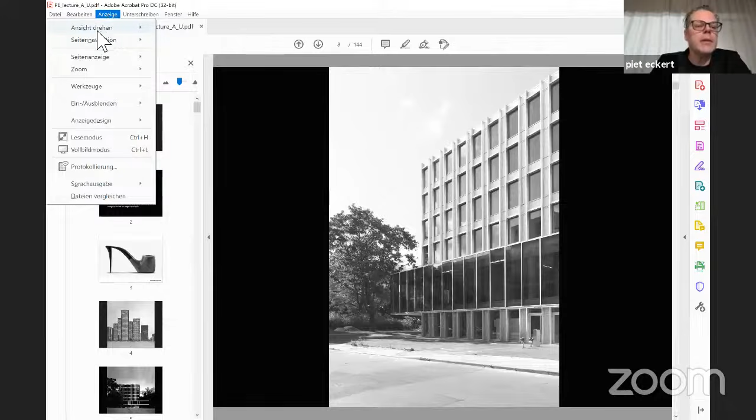Okay, so it's a pleasure for me, and good morning from Switzerland. As Sang Kwan said, this is a particular time here to really reach so many people across the globe. It's 7 o'clock in the morning here. I'm trying to give you an insight about the way my brother and I work on our projects.

We call this issue, but also our work, a frame of strategic methodologies. We are very interested in methodologies in the sense of how do we get today really to an architectural result, and what really influences us effectively in doing so.

I start this short lecture with a small statement: a strategic architecture mixes elements, value systems, and action logics. It opens up a combination of essential priorities. The target of strategic architecture is to manage the coexistence of conflicting values. This is very important for us.

We analyze a lot in the office in order to learn from paradoxes or from discrepancies, so to speak, how to deal with things that seemingly do not fit together.

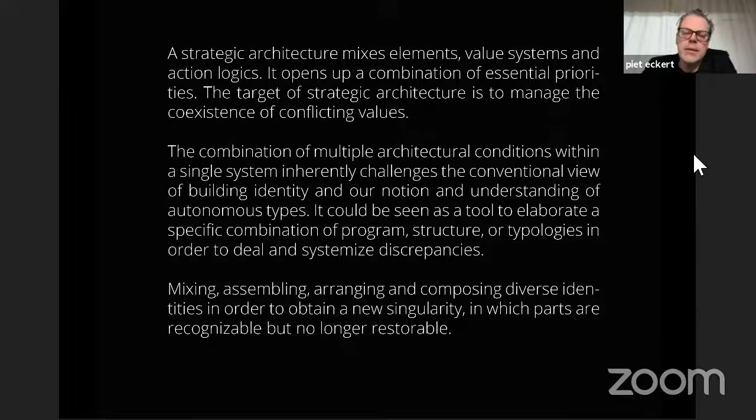I think one of my favorite artists is Jusovic, a Croatian architect and also artist, creating this work—a pipe in the form of a shoe—and it enlightens this idea that I'm trying to make here. Within the realm of art, finding a specific cross-section that connects, to some extent, things that have nothing in common—between the pipe and the shoe—but by the fact it fuses, its condition changes.

And by that, of course, art doesn't have to create or find a new functionality—that's the force of art. But on the other hand, you see in a very obvious and evident way how a new object arises, one that can be read in many different metaphorical ways—between the male and the female, between the paternal and the elegant, etc.

So this is an interest that has followed us from the very early beginning on.

My brother and me, we started our work by using the work of Mies and speculating on issues - how, for example, you could step up scales, or how you could find configurations that would lead to new programmatical, performative, or configurative constellations. We used the architecture of Mies to liberate ourselves specifically from the aspect of architecture, because it was so sublime that it gave us a moment of freedom, not having the obligation to think about what architecture must or should be. I think that enlightens a similar process.

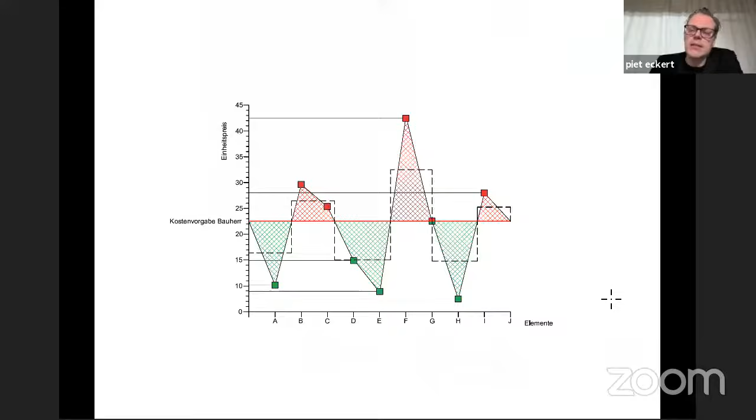So instead of running a flat line, we tried to open the spline, so to speak. It's the same model, and this is very exciting for us. This is the architectural formal expression of that - this is where you save money, and this is where you spend it. So there is almost a deal within your own architecture about what intensity, prioritization, and attention you give to the project. It's not a project without detail focus, but one that relates exactly to this strategic axis. Of course, it got built and is running successfully.

Over the years we collected this catalog, and became more aware that this methodological aspect we were interested in can be juxtaposed, compared, and related to each other. This is actually the sense of the body of our work, because we operate in a way trying to find an answer to an analyzed brief that discovers things that might be risky or incoherent, and then we try to impose this as a strategic form.

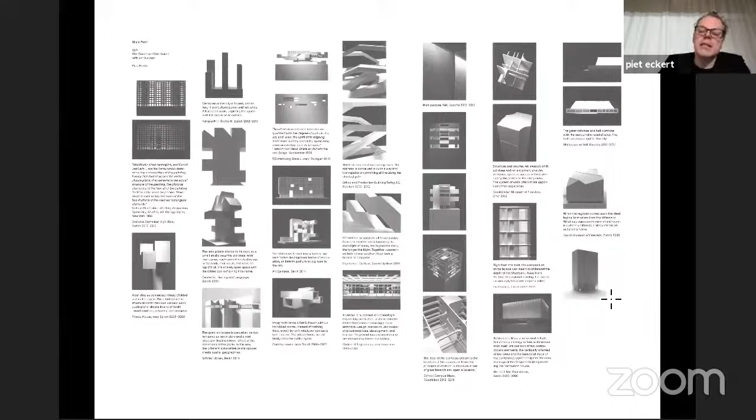I'm showing a few projects because I'm aware of the shortage of time, but we look at a western part of Zurich, which used to be a back office and warehouse area with lots of different types of buildings - a relatively robust quarter, giving an impression of the nearby context. It's a mixed area between workshops and large back offices of international banks. This is the context where our client asked us to design a new high-rise building - in Swiss terms, 40 meters.

We received this program and had to sort it out and organize it. It was a business hotel, a palliative care healthcare concept, with a client that is a diaconry, so based in the health business.

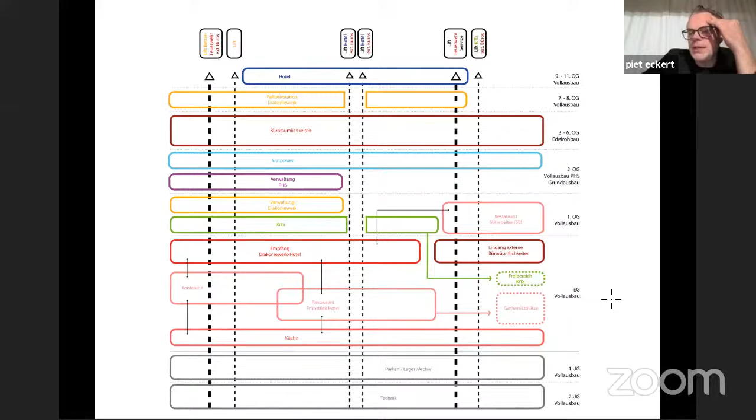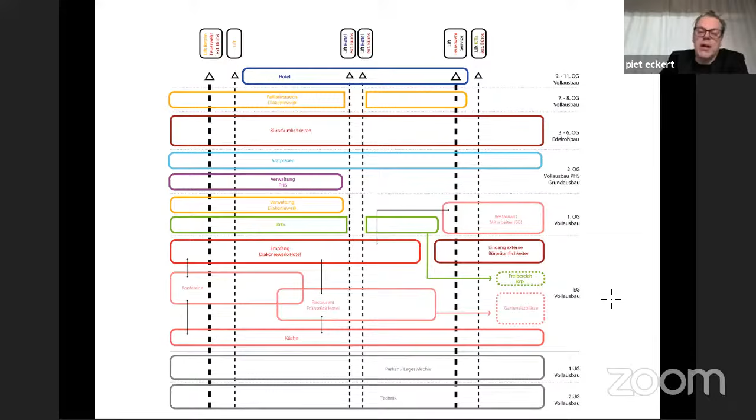So this is a mixed-use building, and the question that arises is how do you make an architecture that really works independently of program and activity. The first part of our commission was to encounter exactly this condition, and we came up with a resilient idea: a load-bearing concept with a gridded facade and an eccentric core, slightly shifted, to allow different spans in the building.

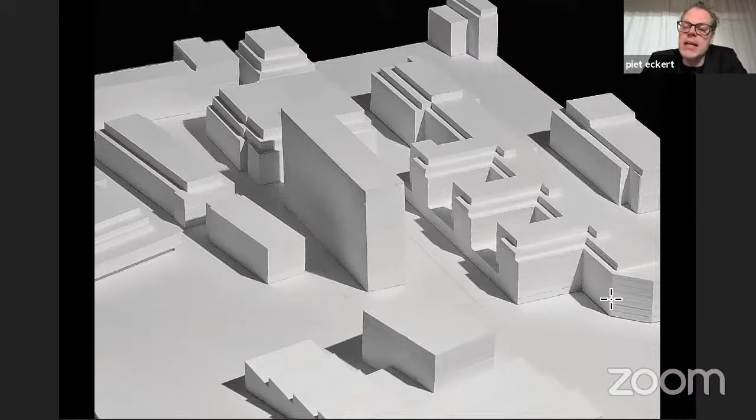It's an architecture that deals with exactly two components: core and load-bearing facades. There's not a singular column in this building. The urban scheme allowed a slab building 40 meters high, 15 wide, 85 meters long. And this was the project.

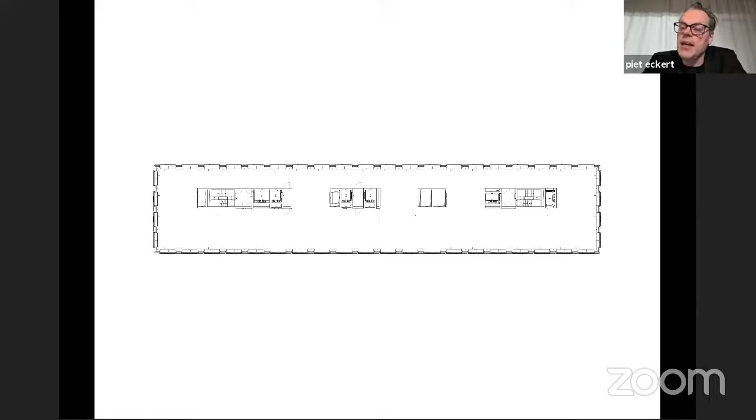The first phase of our contractual delivery was an accentuation of a load-bearing facade and an eccentric array of cores that could deliver and perform simultaneously different programs, such as a palliative care next to a business hotel. And this was the expression of space.

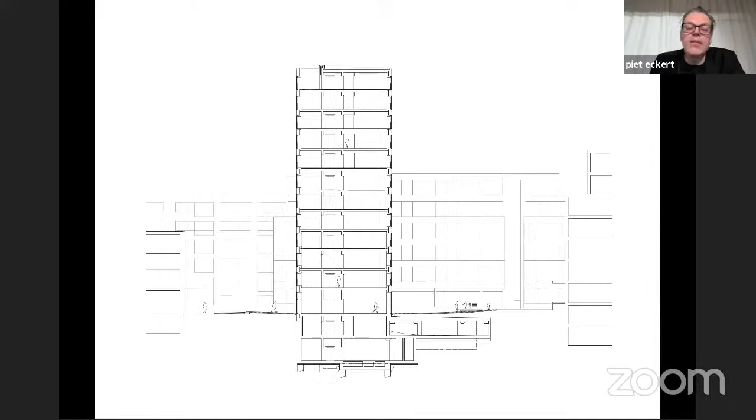It was a concrete shell with a concrete core cast in situ, and load-bearing facades designed by precast elements. You see how this small high-rise, this slender slab building, sits in a kind of courtyard condition.

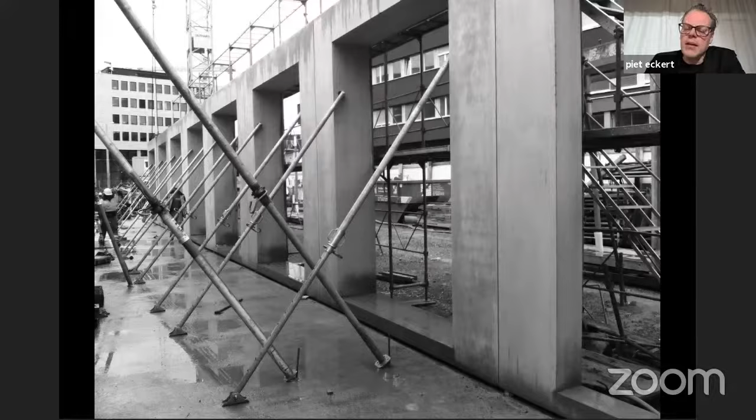These were the elements we designed, the precast elements that became the load-bearing elements on the outside. We could basically build the building like a Lego building, so with very high speed the building got assembled on site. You see the progression here, the assembly.

What we had in mind was to intensify exactly these two elements. The precast concrete elements were done in a perfection that there was no necessity nor financial possibility to really cover them. So the idea was a primary expression of architecture that resembles the core and load-bearing facades, leaving the space in between as a filling, a complementary architectural agenda.

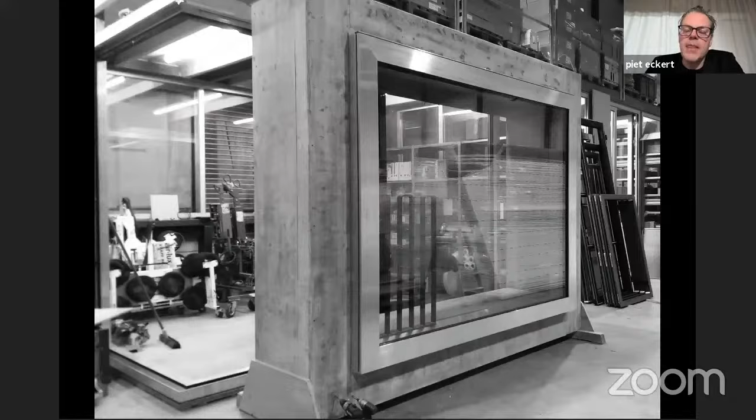We equipped this project with a sliding window, which is very difficult to do in Switzerland because sliders normally have brushes and aren't really tight, so you lose a lot of energy. We designed this as an electric slider combined with air pressure, like you see in any bus in Tokyo or Zurich, where every time the door closes they put pressure in the lips to create a tightening condition.

So we managed to organize a window that could be opened through the release of air pressure and closed, an almost automotive project assembled on site. The project had this very resilient, robust expression of architecture, with a slider that could always react to any activity or simultaneity in the project.

Although the project is very rigorous in its sense of order, it is very playful in its consequences. The building sits very calmly, almost stoically, in a heterogeneous site with all kinds of different buildings and ambitions. You see slight irritations from this order expressing individual activities of individual programs that we can no longer steer, creating this rigor in order to allow a very relaxed, tolerant way of accommodating whatever happens.

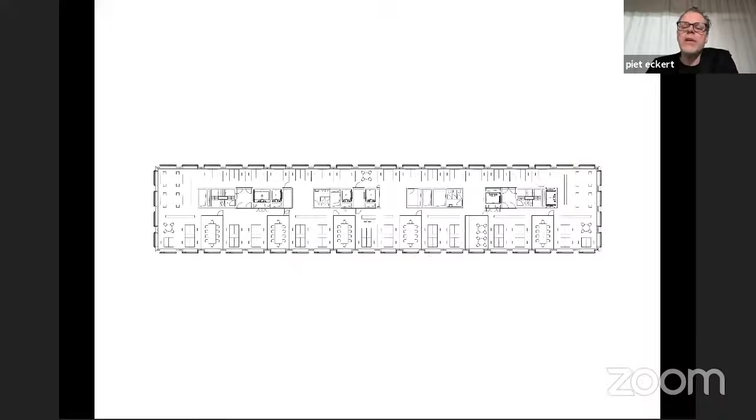So in a way, it was a very defensive strategy, but luckily we could in the end design the entire building as if we could test our own strategy. You see these shifts and so on. And this was basically the approval, or the system.

We had an office layer, and you see now how the same building supports a fundamentally different program, such as a healthcare clinic, which is here, such as a business hotel, which is here. So it is an interesting way to sustain these approaches of interior exploitation of the building.

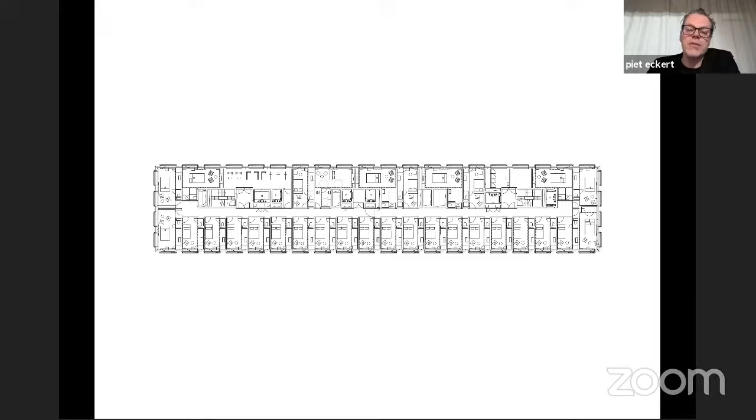I'll give you just a few images, and you see that this concrete shell, the load-bearing wall, has always been the same, but it's never the same. This is exactly what we were aiming for. It's a primal expression of architecture that's countered by different tones, different materials, different lyrics, so to speak.

This was the business hotel. You see how a wood fit-out encounters our concrete shell. This was part of the hotel, part of the suites on the top level. You see always the same elements, the concrete elements, that through different kinds of uses are just changing context. It shows how this resilience of architecture can really be performative, and every time it creates a different setting, a different atmosphere.

Later, we built our own office in it. It's a very simple concept, an aisle of 85 meters, running the whole length of the building, working with the same concept again. So really using this expression of concrete to encounter the palliative healthcare, which is a delicate program, because people are being served and cared for in their last moments of life.

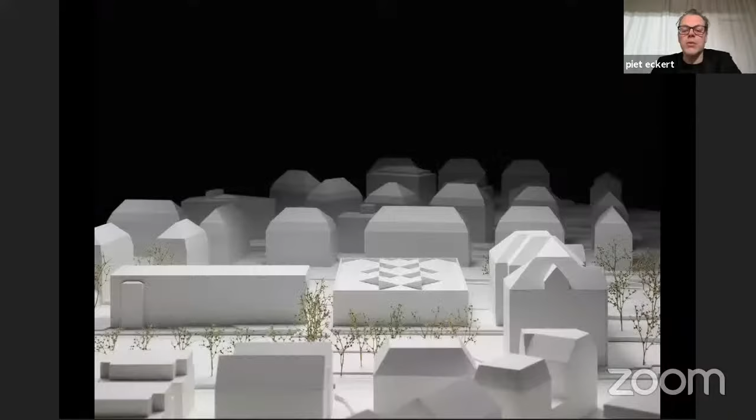So I'm shifting to a different program, educational program. Public building is a big issue for us. We think that we should urge our architect colleagues as well to strengthen the architectural discipline along public buildings, because it's so important, the expression of public institutional architecture.

Now, this is a very prestigious site. It's an old school campus with an early Swiss modernist architecture school on one side, from the former city architect Hermann Herter in Zurich, and on the other hand, there's an old national-style school building from the 19th century. Our extension sits in a very low habit and tries to accomplish and extend this site.

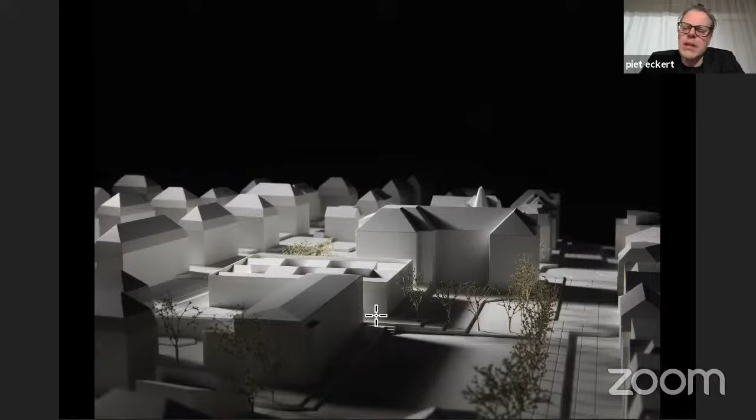The program was a very challenging one. It was a triple sporting hall and a secondary school with classrooms, libraries, a school kitchen, and the possibility to facilitate the midday lunch area. So you see the silhouettes of the building. We're trying to really not interfere with the two listed buildings that are organizing this perpendicular space frame.

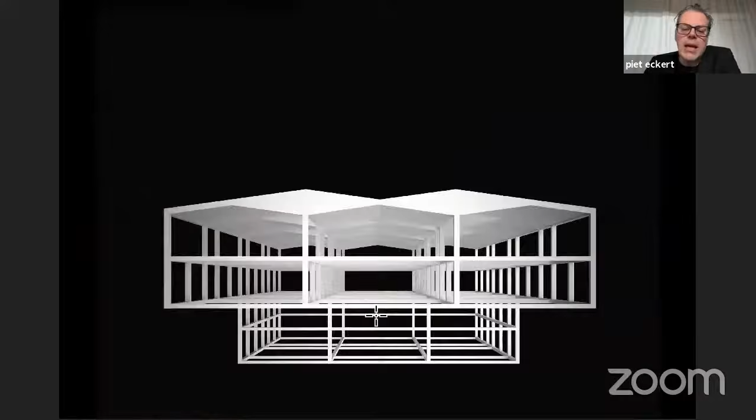What we have done, and this enlightens our interest in this strategic methodology, is we very quickly realized that we were interested in merging the architecture of the hall with the architecture of the school. Normally in a campus, of course, you would do it apart. But one creates an obligation, so to speak, to the other, and by doing that, it creates the question: how are you imposing one obligation on the other, and what can you discover from that?

So the image you see is a triple sport hall that got structured and spanned by a space frame, and on the top level there's a school sitting on top of this hall.

The sport hall is sunken into the ground, and this created this structural model where you see the space frame bridging the deep underground lying sport hall. This creates a different proportion, a different dimension for the school that arises on top.

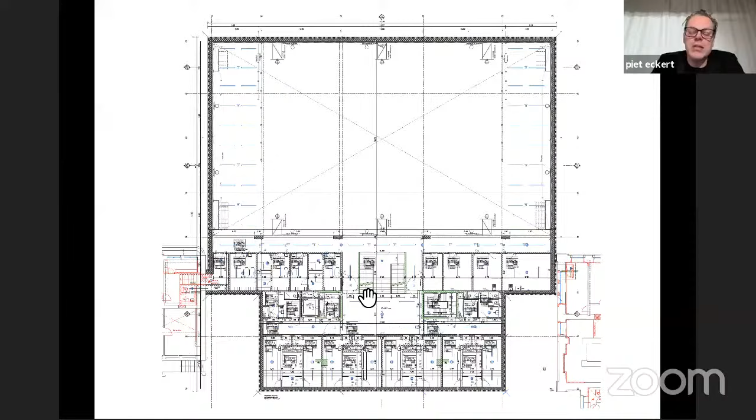This was the triple sport hall, the plan on the underground. You see 1, 2, 3 halls, you see the guardrobes, and here you see we are almost finishing the building by end of March. We are happy to give it over to the city.

So you see the space frames that go across, that basically sit at the ground level and create the daylight access into it, and then deeply in it we organize this hall.

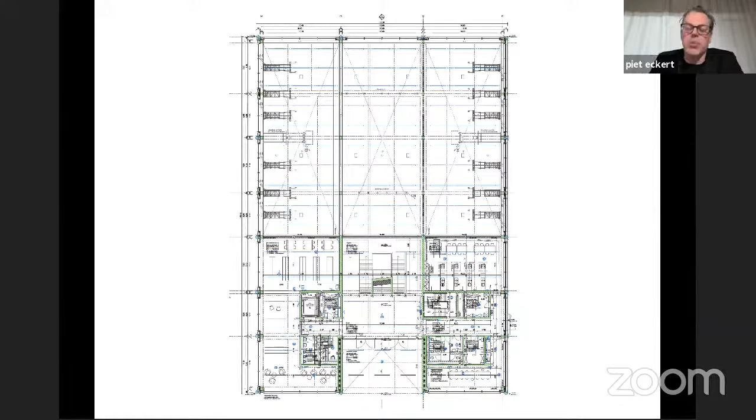And it creates a dimension for the school which is very bizarre, because if you build classrooms independently from a gym room, you would make a different layout, which is clear.

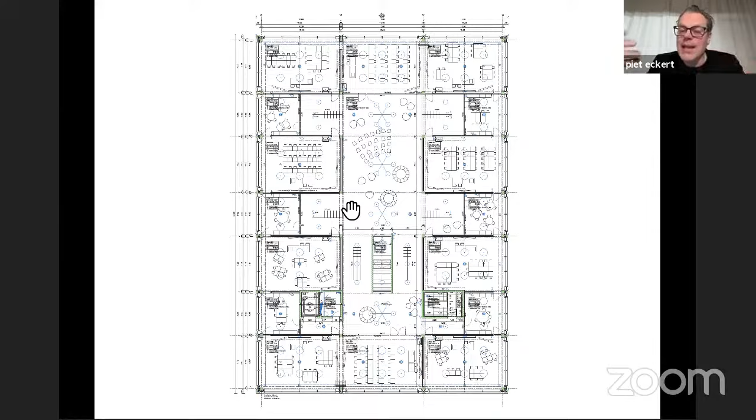What we did to really exploit the extra depth of the space is we turned the classroom perpendicularly 90 degrees and used the short side, introducing a second facade. So they're lit from two sides, which creates an expression of roof, basically a combination between a pitch and a shed.

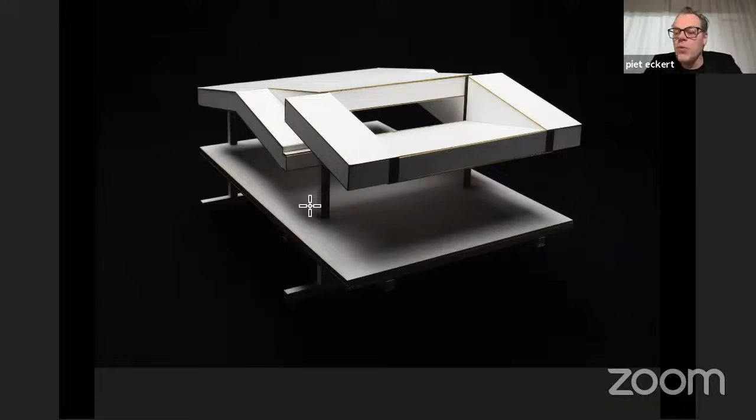So what we created is a lighting system for the aisle, and in the next bay a lighting system for the classroom. This creates the roof system that is basically the architectural answer to the brief: to create a school with an extra depth of space.

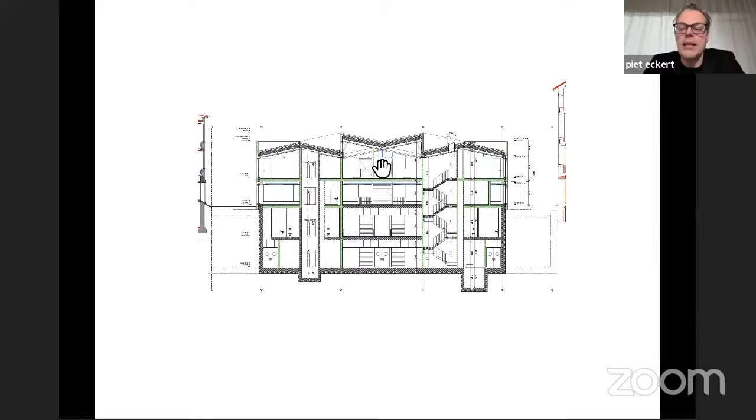You see this quite well in the drawings. This is the pitch condition of the classrooms, and you see how the pitch opens in a shed way, skylighting the central aisle, which is a didactic free zone where you can play in groups. Then in the next bay you see how the light is introduced on two sides, from the outside and from the skylight side.

You see the space frames that go across, sitting on the sporting hall, creating a very intense package. You could call it an alter ego or an obligation of a new body, where both elements need to be architecturally exploited.

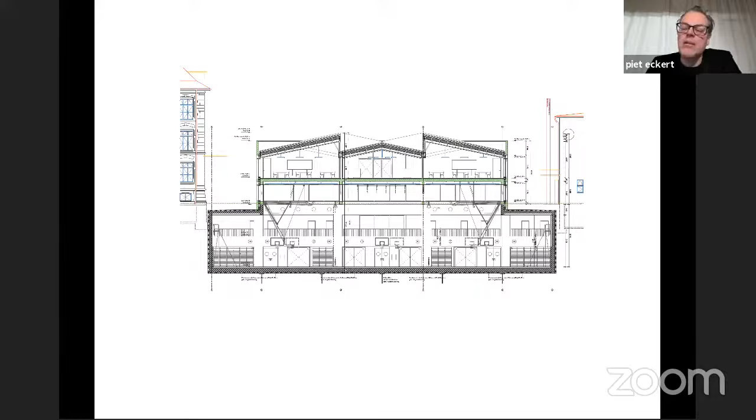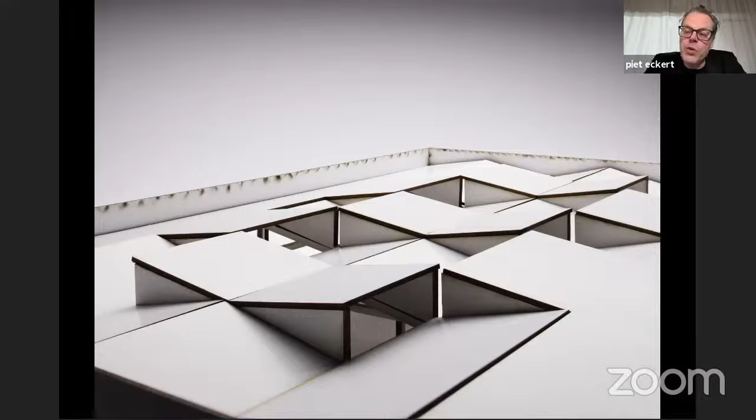You see the long section, the same system. This roof, of course, was also linking to the neighborhood, to the pitch roofs nearby, so we could link back into a kind of contextual behavior.

These are the shots, not yet fully finished, but you see quite well this pavilion-like roof, lighting these two conditions, the aisle and the classroom. Another view, the classrooms at the corner.

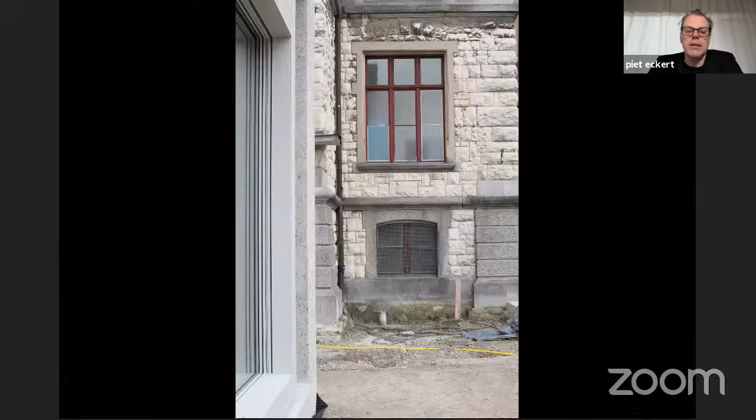The affinity to the ongoing process of refurbishment, the architecture of the existing school.

Schools are important because they, in a way, allow us to think in a very prototypical way about the role of architecture, and how you anticipate the program.

What we did, from the point of view of creating a very dense, squarish building, was to maintain as much as possible of this beautiful landscape. It's a kind of stacking idea.

But the story was much more complex, and it gives insight into how you could strategically react to this. The school is so wealthy that these wealthy people now send their kids to private schools. We, my generation, went to public school because Switzerland was investing a lot into public education.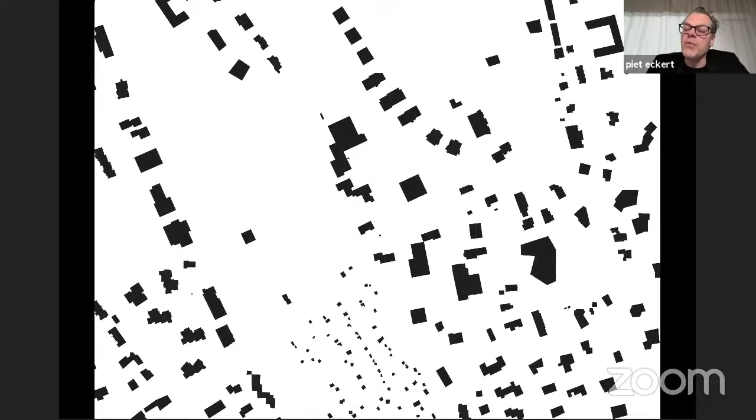So this was a project to really reactivate the public school, to encounter the condition that school is also a social melting pot, and should deliver the possibility for all to access education. The program we were used to in Switzerland for dealing with schools was fundamentally different here, and it was very provocative in that sense.

You see the model. We came up with this concept, basically a school which you see with the corridors. These only represent the formal configuration of the corridors.

We used the corridors as a structural system because the program for the first time asked really for a completely flexible classroom. We never experienced this so far in Switzerland, because normally the classrooms are fixed modules of 80 square meters, with the corridors as flex zones or niche areas. Here, they actually had a claim to say we need classrooms that start at 18 square meters and maybe end up with 240 square meters.

So we encountered basically the first time a complete dissolution of classrooms, and we designed a structure that had a stable, resilient structural aspect to the corridors. You see the corridor expression here, and on every level we rotated this 90 degrees. So this was a corridor, this was a big span of classroom, this was a corridor, a big span of classroom.

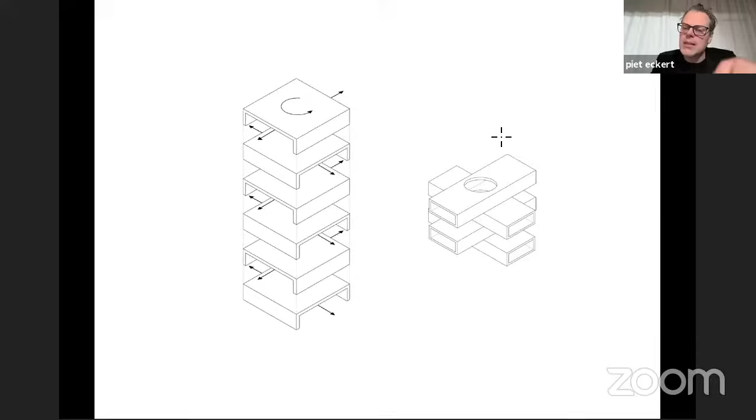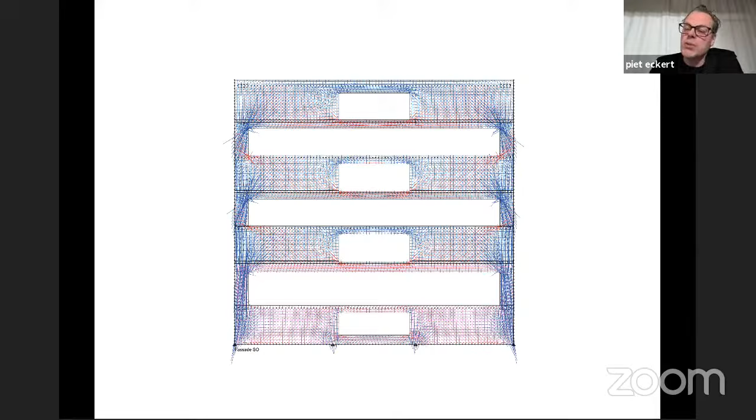So there is a kind of interplay between what you do with corridors and the liberty that you gain from it. The superimposition of the model shows this. It's a very simple action to simply rotate every level 90 degrees in order that the corridors prevent the span or prevent the sagging from the large spans. So the corridor would attack here, and then you pick up, so to speak. It's working like a pickup beam, and therefore there is an intense relationship between what's supposed to be stable and what's supposed to be on a permanent change.

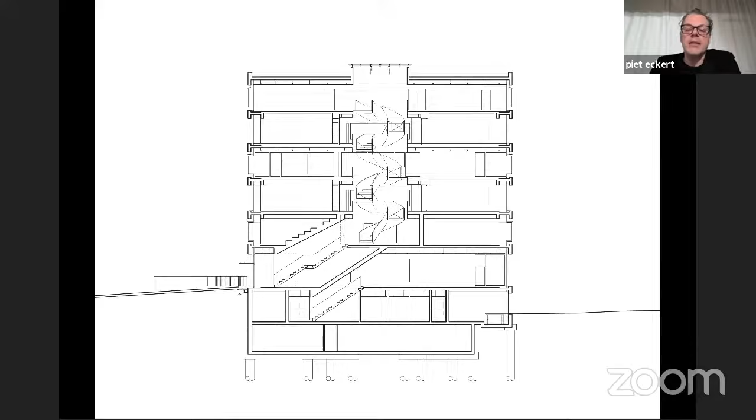And the consequence is it delivers the architectural expression by that means. It's no longer a question of whether it's a style or not. It simply reflects this programmatic issue about flexibility and definition, or stability and change.

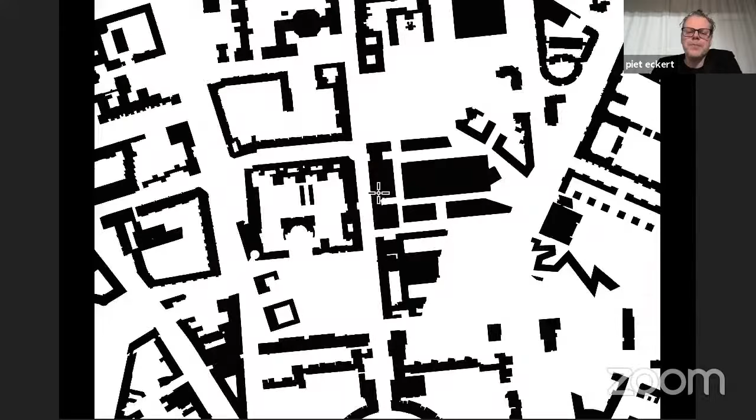In a very similar way, we won this project of the Taz, which is the leftish newspaper center in Berlin. It's important for us that this was a site linked to the early 80s of the IBA. You see John Hejduk, you see these kinds of discoveries of the 80s, where the work in Berlin was not driven by completion of blocks, but by working with fragments.

So a totally different premise at the time, with an absolutely beautiful project by John Hejduk, small tower, small attention. It was just opposite our site at Friedrichstraße. If you know Berlin, Friedrichstraße is one of the most historically driven, dominated streets of Berlin. It has been destroyed through World War, subdivided, Checkpoint Charlie.

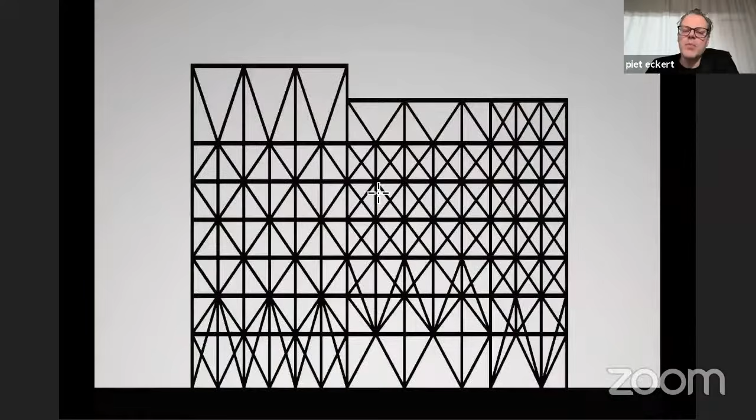And what we came up with is a concept with two ideas: a performative idea of a net going around the building, but also a metaphor to say every member of the net is part of this union idea, because you cannot have a hierarchy, you cannot simply take a member off. So we created an architecture that dealt with 1.50 meters, creating a structure that stiffened the building through its diaphragm of structures. So we had no cores. The building is coreless, and therefore creates a huge depth to be exploited by the company itself.

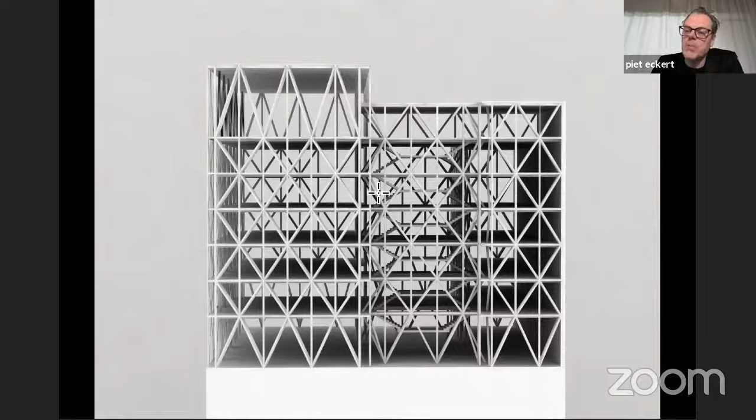And I never really met such an honest client, because they said we need to come together on one point, but we have absolutely no idea what the future brings. So in the media business, it's very important that the business has the ability, also spatially, to reinvent itself, to say how are we going to work.

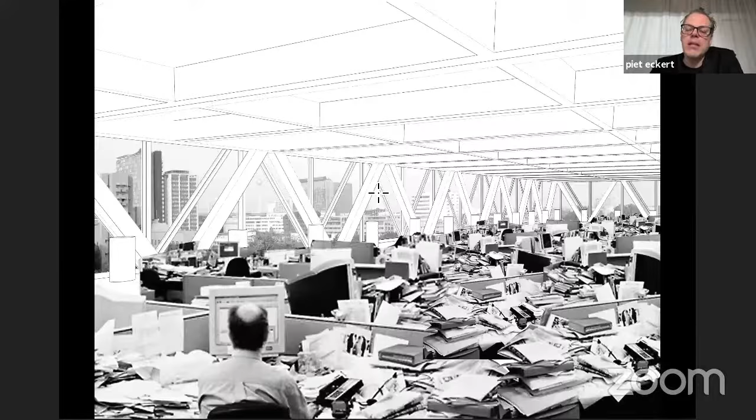This was our model: to give them a very precise architectural edge, leaving a lot of flexibility inside, producing this liberty to mess around, so to speak, or to keep going with the mess. So we gave them something like an occupancy strategy for their own agency, as if they squat their own new headquarters. This was a kind of relation that we started to deal with.

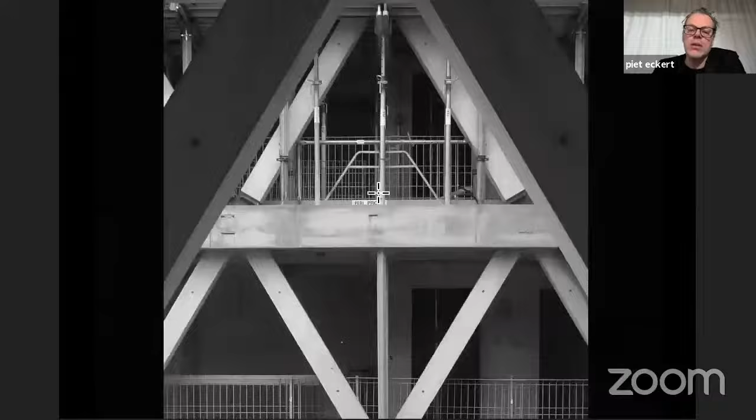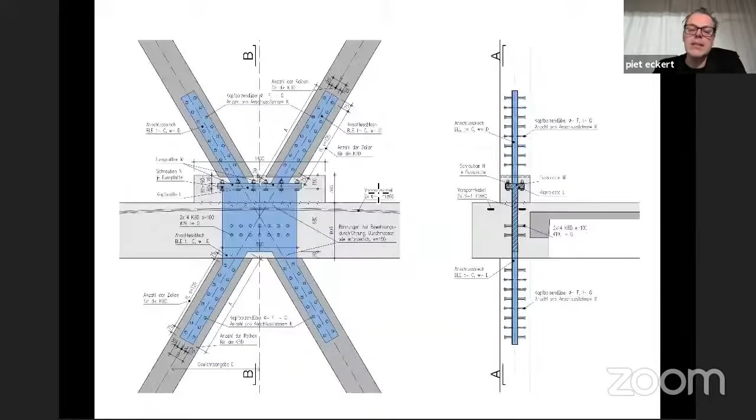The construction is an interesting example where engineering, structural and civil engineering work, and architectural work come together at one point and become the same. The expression of the detail and the making of it is the architecture. So it's a very simple plan with a central core, no core in itself, leaving this depth in the space, these large depths in the space.

And this is how they squatted the building. You might be irritated, but they have dogs there, and they work with plants and all kinds of things. But the longer I really visit them, the more I like it. It gives you this relationship between how architecture can really dominate, be resilient and picky about the way you want to express it, and how much liberty you can give back in a relaxed way. I found this very interesting.

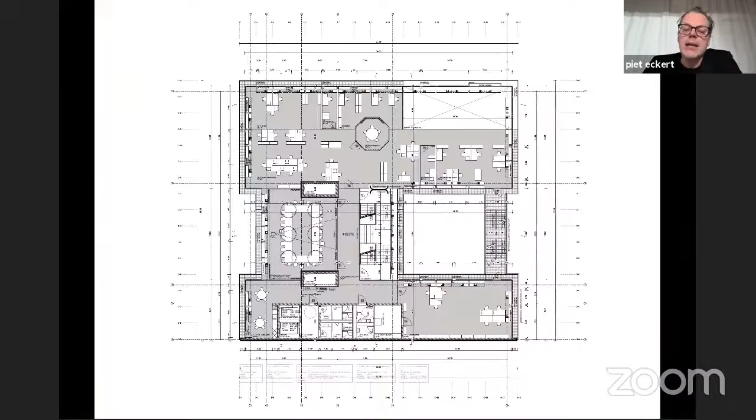A few other expressions: this is the main meeting room where they have their redaction meetings. The ground level - this is how we gave them the building. So it's an almost infrastructural expression where the occupancy comes through usage.

It's not that the opportunity passed by - this is the current restaurant. They put the restaurant on the ground level. So there's a lot of simultaneous occupancy in the building. The facade basically got mirrored to the outside with a very fine net of galvanized steel, which has this thin layer of metal that reflects the color of Berlin and therefore integrates it back into the system.

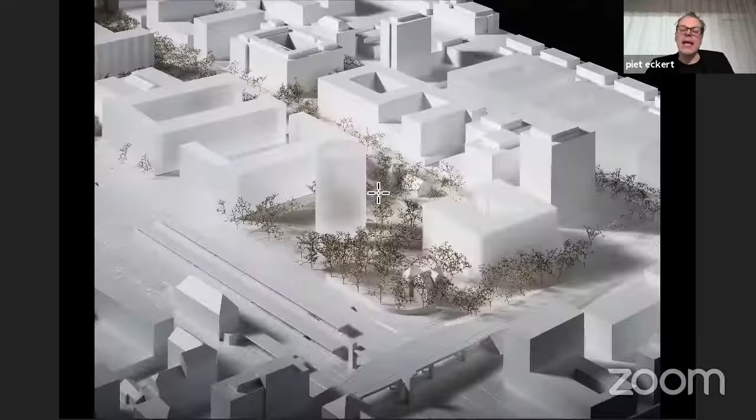I'm coming to the last project: a master plan on the Zurich outskirts, a city that has had massive growth over the last 15 years. A typical agglomeration project. This is our project on a site where you normally would not make any housing project, but since everyone needs housing and the housing shortage is so dramatic, you as architects have to impose this and think how you can make things possible so there's still a healthy condition of housing.

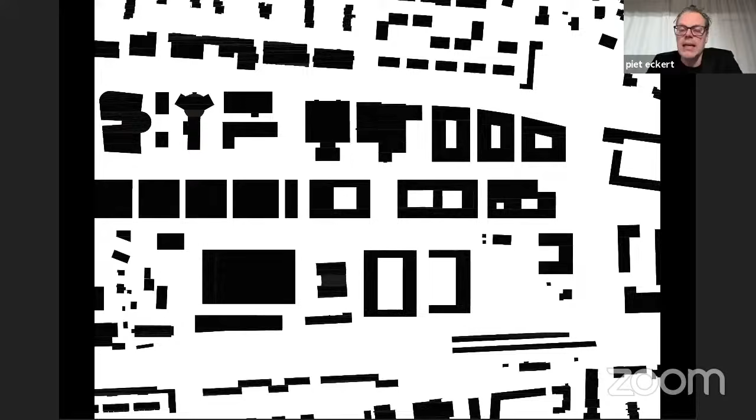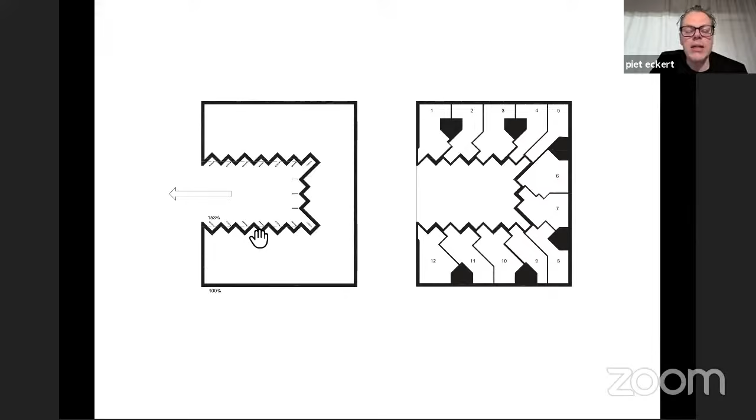It is linked to the track field, to a highway access, so on. So we have almost a triple-sided exposure to noise with 85 dB - really high exposures. What we did is introduce the core and organize an undulation that produces, through this geometric intervention, 150% of the original length. So we make out of a constraint a strategy that gives us a possibility that normally no one would grant you, to increase the surface of your architecture.

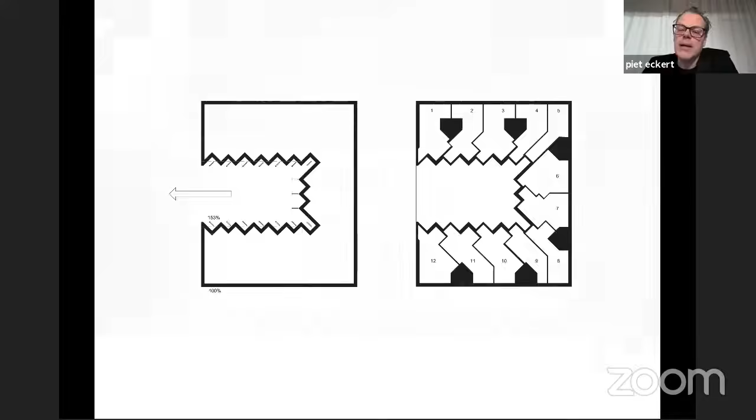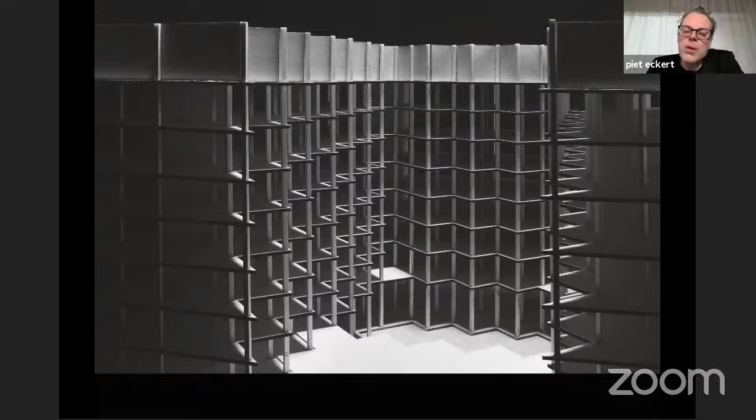By doing this, we can expose, we can link the architecture and the apartments to a very calm, secure core. This is the strategic model again, the structural model, creating this kind of own imposed courtyard.

You see the building from the outside, a similar expression, primarily the structure, which you see with the filling and metal panels, the opening of the court that sort of filters all the apartments to the adjacent upcoming park. You see how we open up this system.

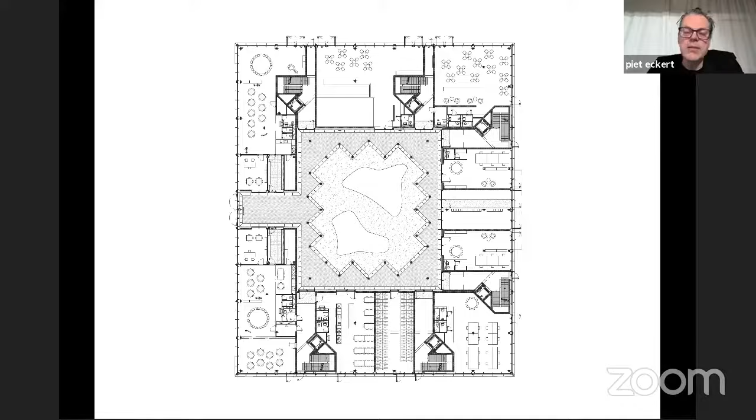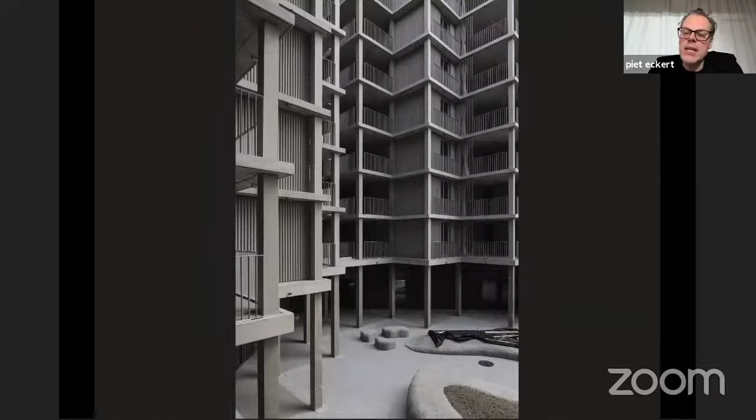It's a skeleton structure that extends into the balconies, the ground level with social activities, main entry, kindergarten, shops. This is the courtyard, which runs along a kind of arcade, becomes the meeting point of the inhabitants, and has this capacity to create almost a micro-urban condition where it creates its own sense of neighborhood with its own intensity and exposure.

You see the plan that operates to negotiate between the orthogonal condition of the perimeter and the 45 degree angle to really view into this upcoming public park, which you should see.

You see these structural expressions. This is the park, this is the view. So everyone basically filters and sees through this concept of opening up and securing a calm side for apartments. It's the inside of the apartments, the cores. What's interesting is how this negotiation of perpendicular condition and 45 degrees produces their own causal relation, their own complexity in the architecture of the apartments.

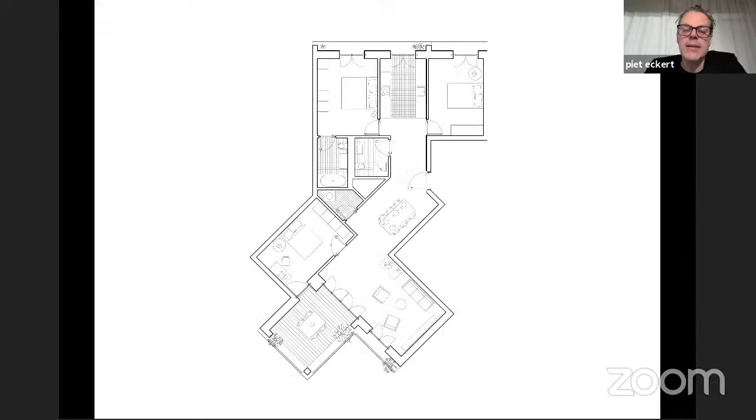It's not style, it's performance. And this is what is more interesting for us to really work exactly in this framing of these two constellations. You see how complex the apartments rise from a simple outer condition, and this shows the way that the skeleton and the space is being organized, producing diagonal complex apartments as a consequence of space. This is my last slide. Thank you very much.

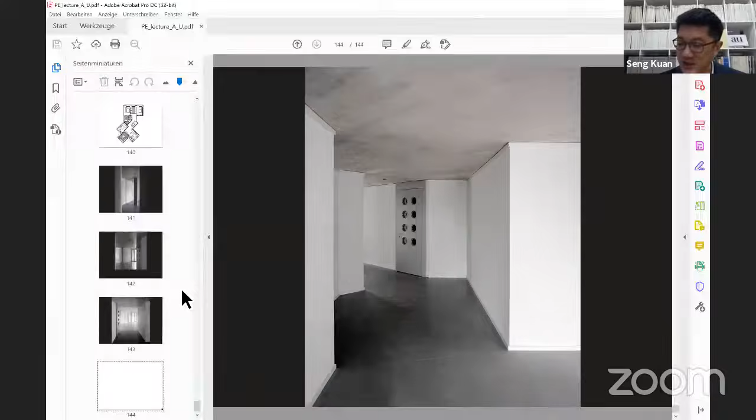I will put one of my questions out first, then we can get to questions from the audience. My question has to do with this idea of global and local expressed in quite a few of the projects, and also your conversation with Mark Lee in this A+U feature issue. There's a passage that references the time you spent at OMA in Rotterdam in the mid-1990s, where you described the sense that architecture is something that could be embedded in a larger overall context. Maybe this idea of atmosphere put forth by Šik at the ETH in the 1980s and onward, where you and your contemporaries became very influential.

So there's this dualism between, let's say, metropolitanism on the one hand, and the local, the atmospheric, this particular sensibility and the building culture of Switzerland. How do you reconcile between these two poles of tension in your architecture?